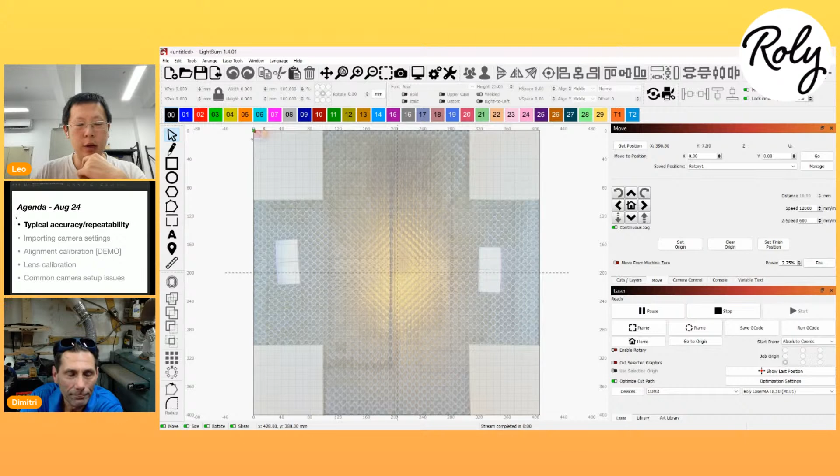Okay, so this live stream is going to be about doing camera calibration on the LaserMATIC10. We chose the YouTube format because I think last time Zoom didn't work very well for a lot of people. So now everybody can see the same screen, and we have a little bit of an agenda and a small presentation, just a few slides to go over. The flip side of that is when people are asking questions, it'll have to be by text in the chat towards the end there. So let's just get started.

I'll go over the agenda real quickly. The first thing we're going to talk about is a typical result that people can expect. I think we should be upfront in that the camera is not going to be perfect. So we'll go over what results people can expect. We'll go over importing the camera settings and a slightly different process than what was laid out in the user manual.

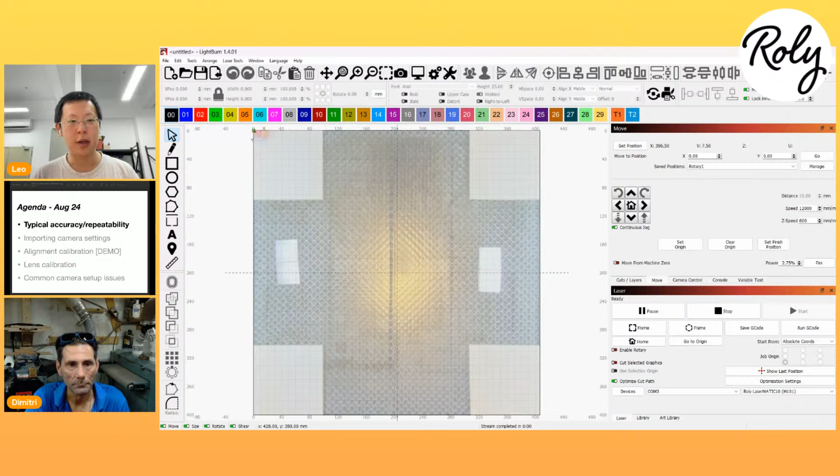And then Dimitri will do an actual demo of the calibration process, importing the files and also doing the alignment calibration. And I'll talk a little bit about lens calibration and why it's not recommended, but some people are curious about that process, so we'll go over that as well. And lastly, we'll talk about a few common pitfalls when setting up the camera, mostly to do with when people plug in the camera and they see nothing at all, or they see a black screen. So we'll talk about those issues as well. And finally, Q&A if people have questions.

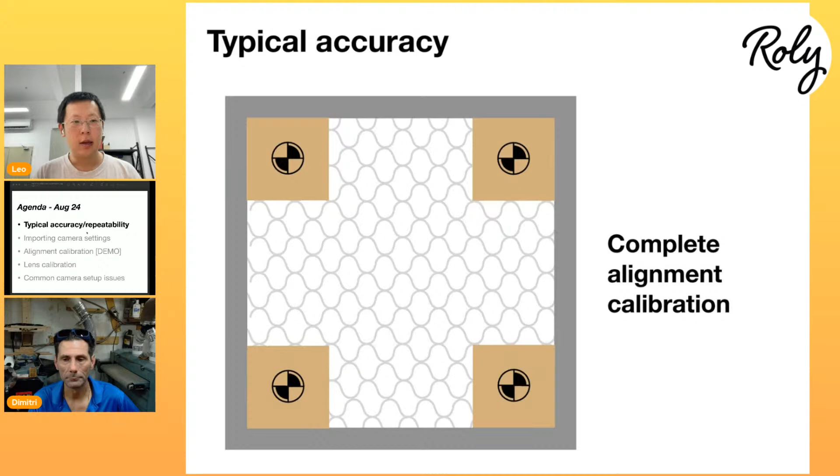So yeah, I'm gonna add this slide here. Typical results that we can expect. Again, like I said, the camera is not going to be perfect. With a good calibration, if done properly, you can expect to be within about a millimeter. So what does that look like? I'm gonna go over that now. You guys probably have seen this pattern before. It's the 4 crosshairs when you're doing camera alignment calibration. So we do the 4 crosshairs here.

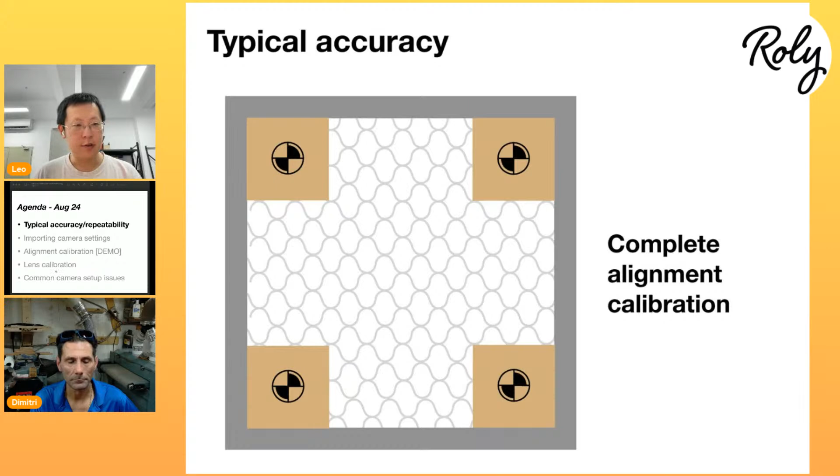That's the first step. And then we scramble the pieces of wood. We do the alignment calibration on smaller pieces of wood placed at the corners. So we scramble them around into random positions, and then we try to engrave concentric circles around the first calibration crosshairs. And that kind of tells us how far we're off by. It's a check you can do right after doing the camera alignment calibration. So what results do we get when we do this test?

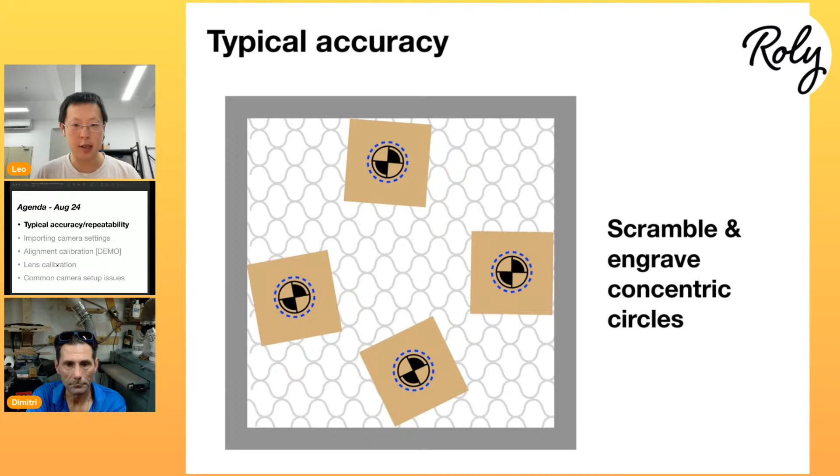So the first one, the number 2, I think can be considered a great result. You can see visually it's almost completely concentric. You're probably going to get this at around the center of your work table, and also maybe in certain areas, but typically not across the whole work table. The number 1 is a more typical result and is what I would consider acceptable. If you look at the circle next to the number 1 there, it's off by maybe 0.7, 0.8 of a millimeter when I actually measured it.

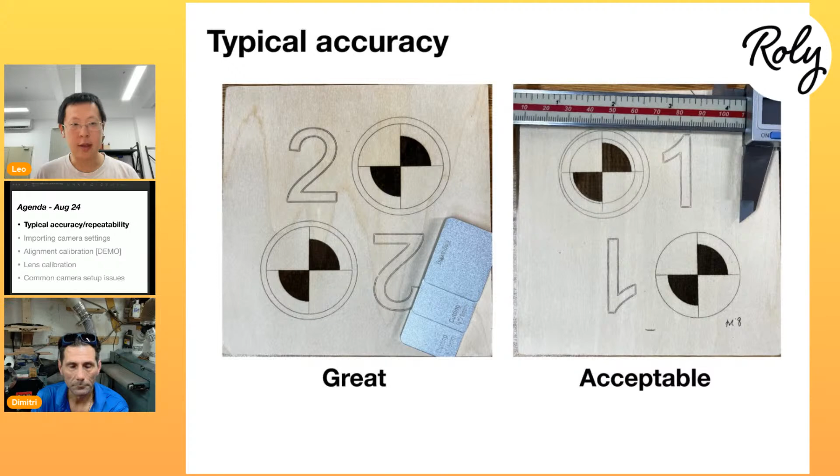So 1 millimeter doesn't sound like much, but when you're trying to line things up exactly, you definitely can visually tell the difference. So if it's a very critical job, you want to make sure you're working in the part of the honeycomb table that the camera is going to perform really well, or you should use a jig that can be positioned and secured at a known position. So that's kind of setting expectations there. And if you get a result like this, it's something we can improve today.

So if you're getting a result like this after this session with the learnings, you should be able to get a better result. Okay, so that's the first part. We want to set expectations.

Next, I want to talk about importing the camera settings. Now this is where I may have been giving people not the best advice in terms of troubleshooting.

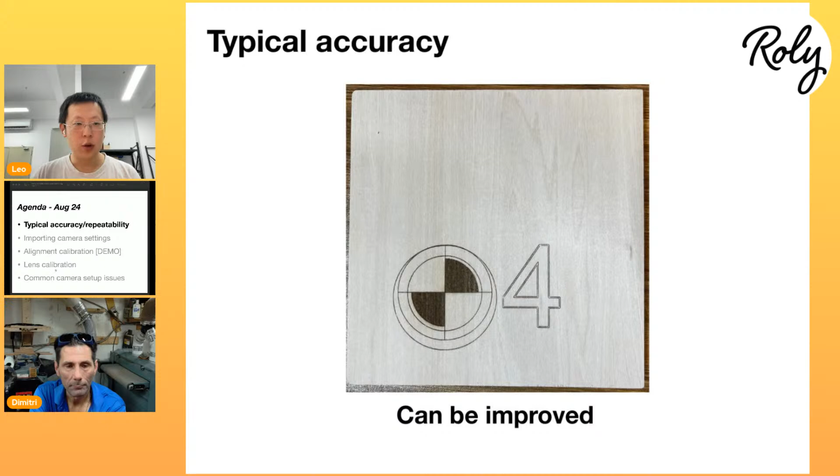Now, what I've been telling people, and this is the mistake I've made before, is when you're getting a result like this, just re-import the machine definitions in LightBurn. Now, there are 2 issues with this. I should probably share my screen here.

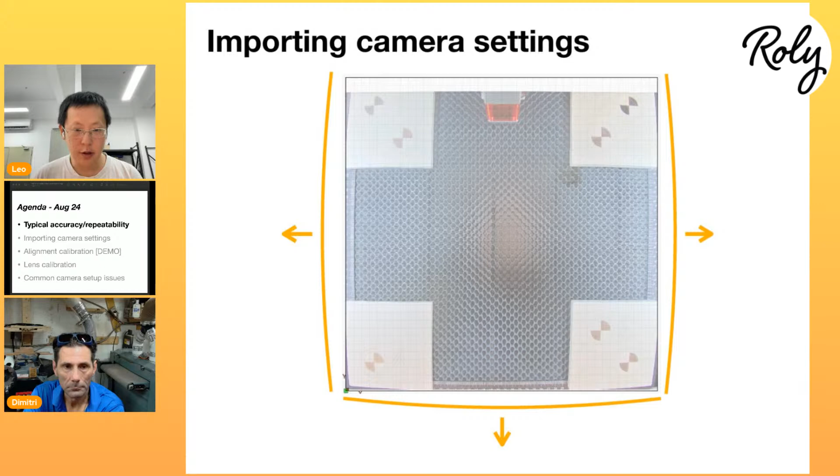Lightburn. Okay, so I'm here in Lightburn, and you can see that the edges of my honeycomb table is bowed out like this.

Now, what I've been telling people is just, you got to go into devices, and you have to remove the Roly LaserMATIC and re-import the machine definitions. Now, there's 2 problems with this. One is it wipes your machine settings. So people typically like to set up Lightburn to their preferences, and then have to start over. But also it doesn't really work.

So now if I have a setting like this, if I go and remove Roly LaserMATIC10 and add it back in, what we're going to find is that the camera image is still going to be bowed. So perhaps that's definitely my mistake for giving people that advice.

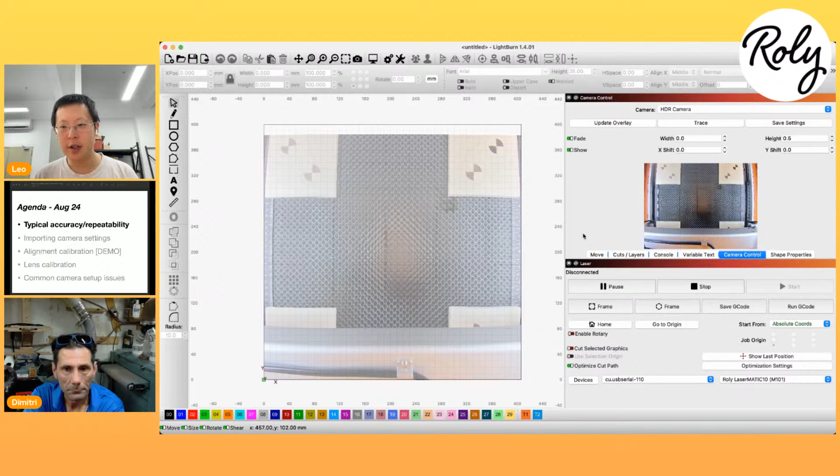But the more reliable way to do it, and easier, is, and I just found this out last week also, you can right click on the camera control panel. So in Lightburn, you have these move panels, cuts/layers, and you can bring up the camera control panel. And if you right click on it, you have options to export and import your camera settings. So in the Facebook group, I posted our camera settings just as a separate file, not together with adding devices here, but rather just settings for the camera.

So if I import camera settings now, it should be lens profile, LaserMATIC. How come I cannot import? Yeah, if I import this camera setting here and I update overlay again, you'll see that the edges of the honeycomb table are now straight, right? And that the pieces of wood also appear straight around the corners. So that's a good sign.

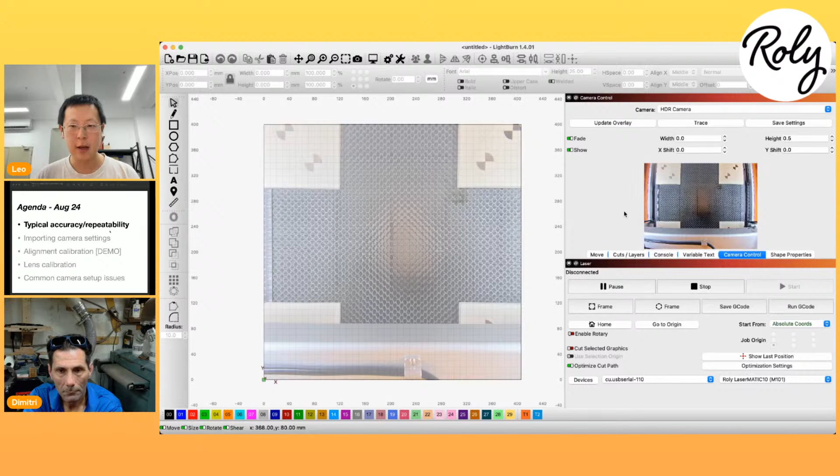You want to see straight edges before you move on to alignment calibration. And if you don't see straight edges, just download the file from our Facebook group, and then go into Lightburn, right click on the camera control panel, and then import the camera settings. And that should be a good starting point. And you no longer have to delete and re-add the Roly LaserMATIC10 and reset everything.

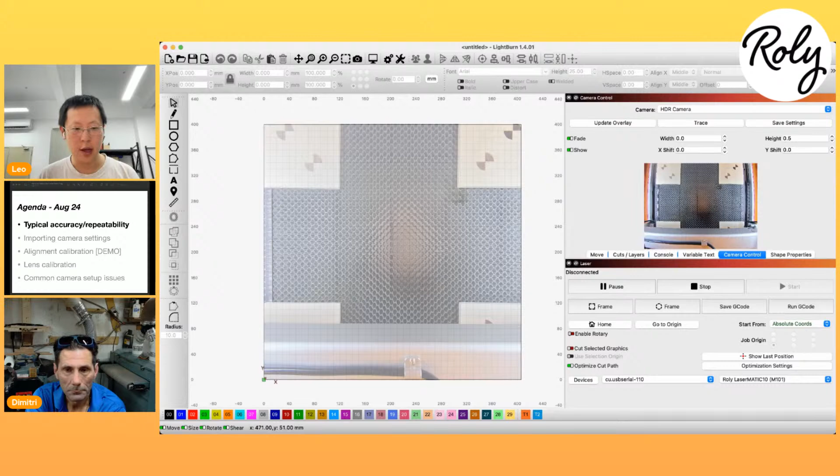So that's just importing the camera settings. But now, once you have imported the camera settings, you have to do the alignment calibration. So I'm going to hand over that part to Dimitri. I'll remove my screen. Okay, you're good to go, Dimitri.

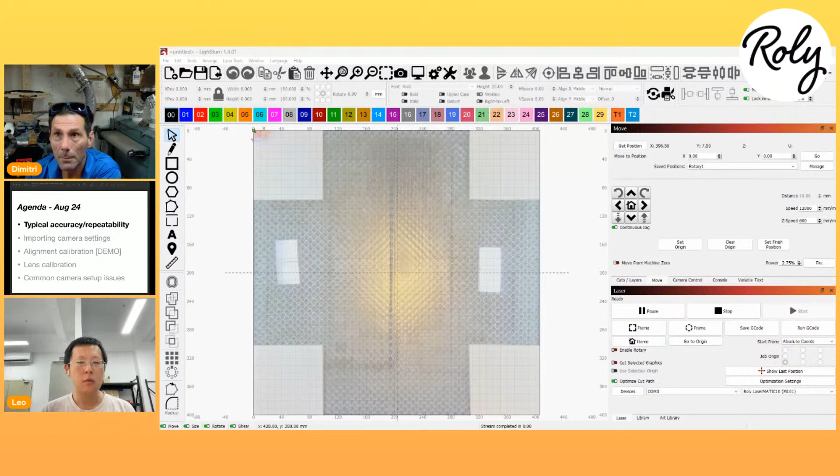Perfect. Hello, members. And Leo forgot to mention that we have to also save in camera. Okay, that's why. There we go. In camera control, once we import the setting, we've got to save the setting as well. So click on save, and that way we have the setting.

So what I'm going to do right now, can they see? They can't see the drop boxes, eh, Leo? No, they're not able to see our drop boxes. Yeah, some people commented already about that. We'll figure that out eventually.

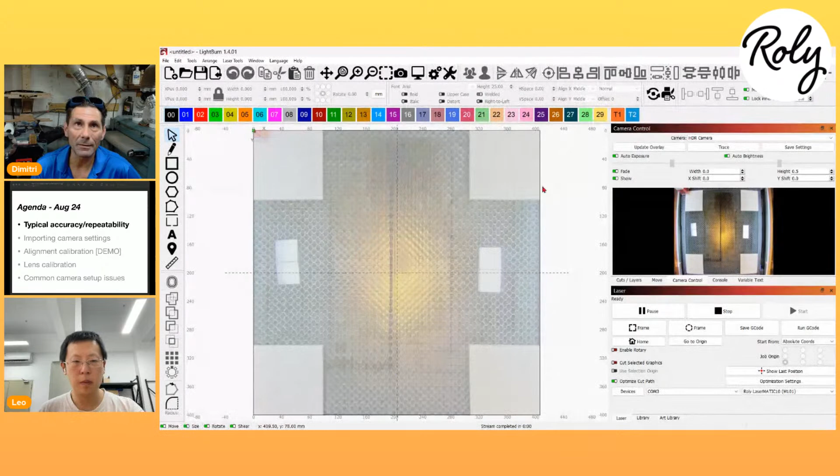So basically my calibration right now is already preset. As you see, all my squares are, my alignment is all straight on my honeycomb. And so we're going to do the alignment. And we're using the HDR camera.

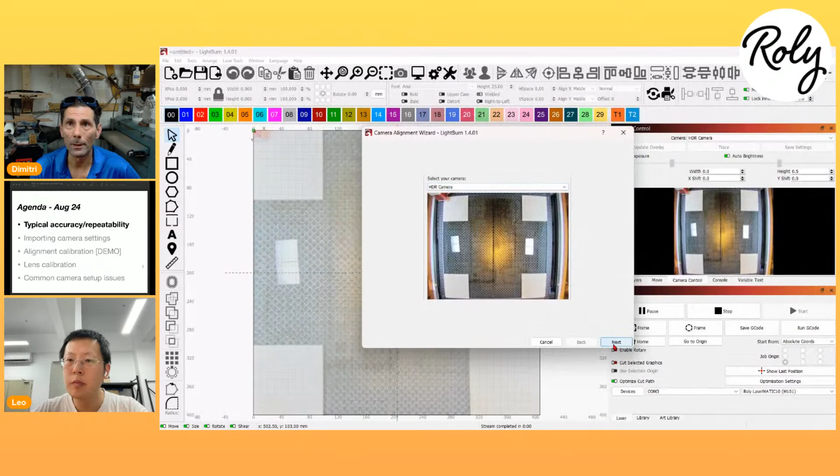Next, now I got 3mm wood placed already. I'm going to jump this up to 9,000 because we don't want to waste your time. And 100%.

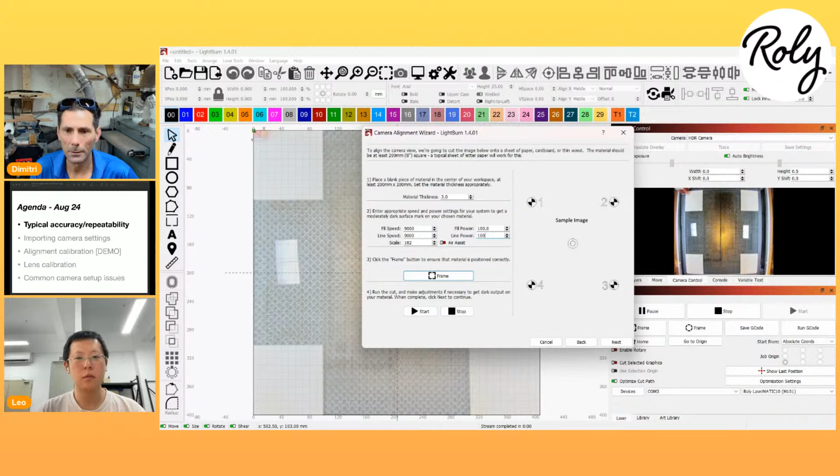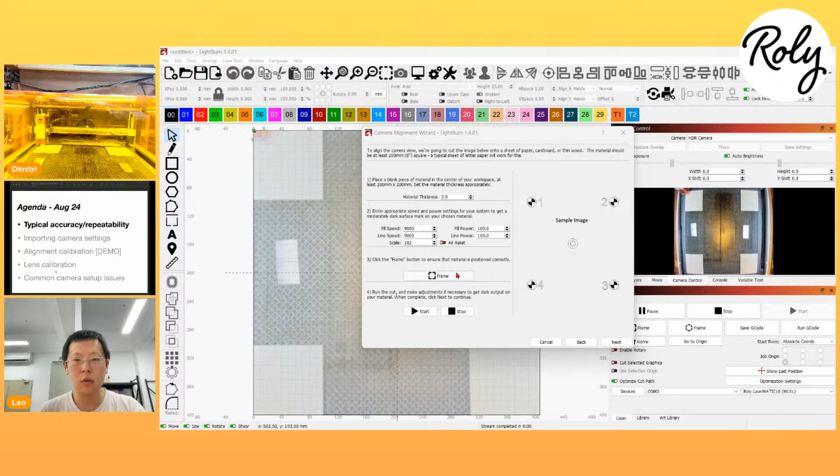I think Leo has a couple of things to mention as I, oops, let me go over here a second. Just want to show the laser. Screen settings, there we go. Sorry about this, guys. And there we go. So I'll show the laser right now. And I'm going to do the framing. And notice over here, I'm using 182 scale for our corners. So I'm going to go ahead and start this.

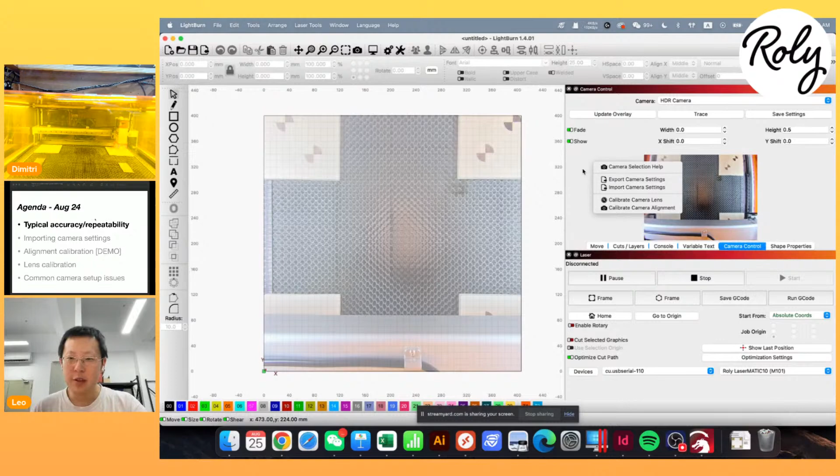So this is where we click import camera settings, and then we come to select the file that we posted in Facebook, and then we update overlay. It's going to be straight.

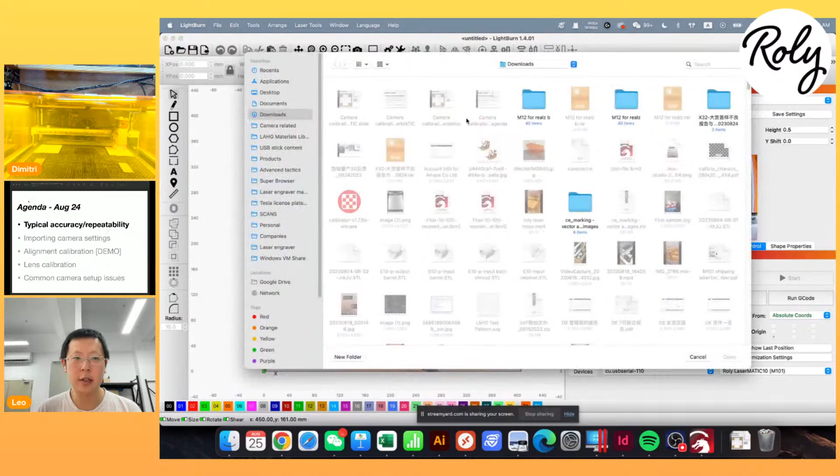So just to go back the other way, to show people, if we import camera settings, and then we choose the profile that was done poorly on purpose, I suppose, if we update overlay, you'll see that we get the honeycomb edges bowed outward.

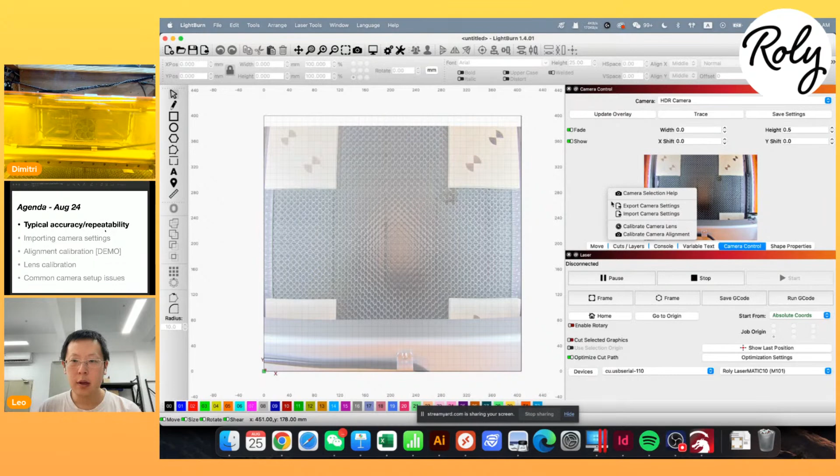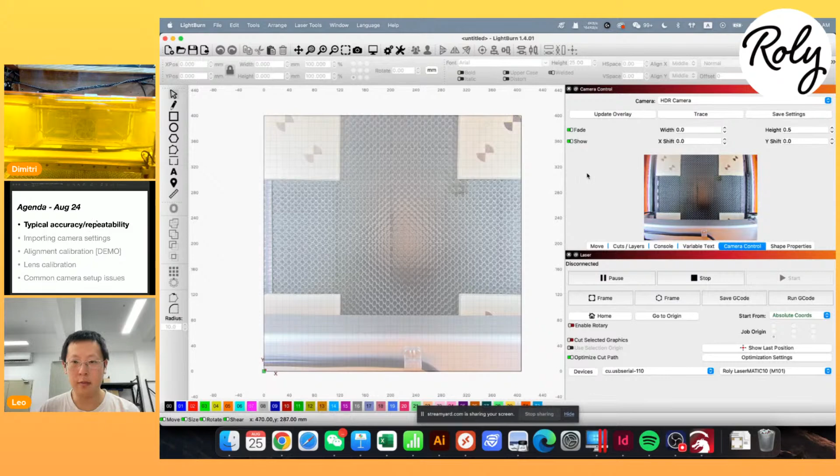And like Dimitri mentioned, once you have imported your camera settings, you update overlay, and then you do your alignment calibration, you gotta be sure to click on Save Settings, so that next time when you import, it's already got that calibration that you have done. So yeah, just now this menu wasn't showing up, so I just wanted to go over that again.

Remove. And we should be finishing up very shortly.

Okay, sorry for the smoke, guys. If you see it on the screen, I don't have my venting presently activated because my impeller makes a lot of noise at 85 decibels. So it's a little bit deafening on the mic.

Actually, I can turn off my mic. How does that sound? Give me a sec.

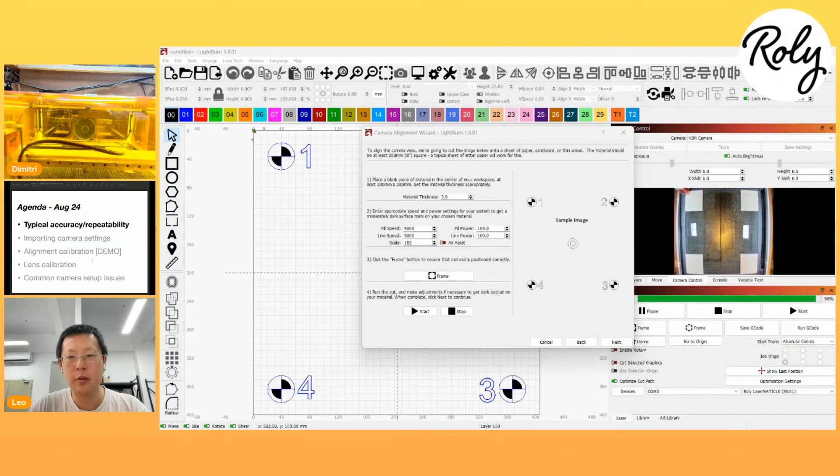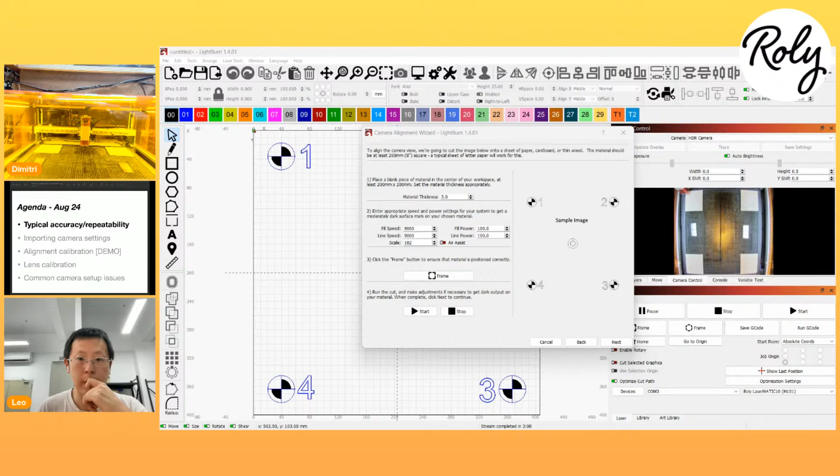Alrighty then. So that's all done. And camera. There we go. So we're all done with that. So next, capture image. And now we enter our little marks.

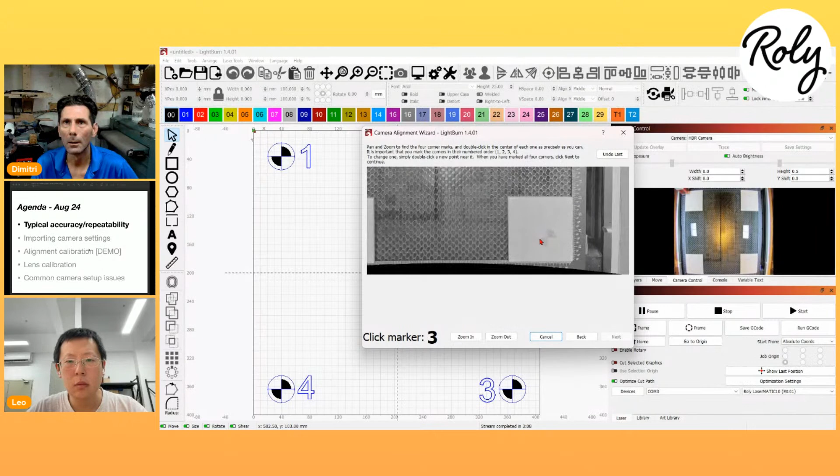And we click on finish. And now we want to save our settings at the same time. So this way now they're in there and we can export our settings. As you see, export camera settings right now since we saved them. And we click in a new name, basically test.

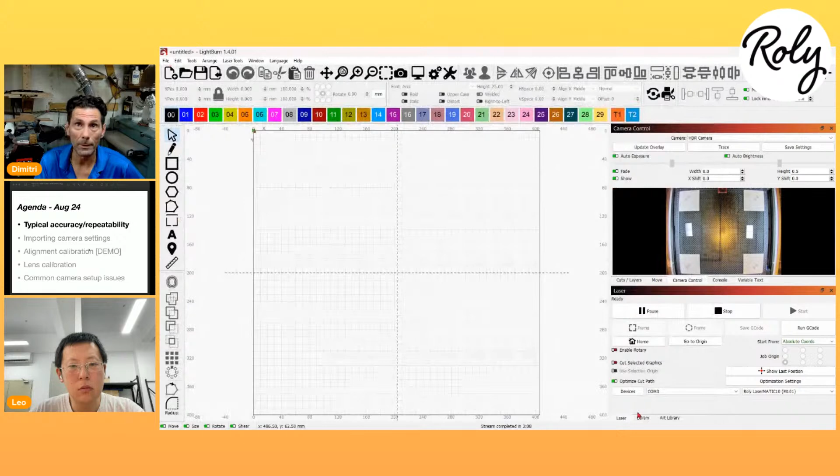As you see on my screen, everything I've already calibrated for all different types of thicknesses in 3 millimeter ratios. And that's it. So whenever you want to bring in a specific thickness of board or material, we just go in and decide which material thickness we're actually engraving on. And by doing so, your accuracy will become much greater. You'll have less chance of error.

So this was engraved at 0, and then I went diagonally to the opposite corner of the grid, overlapped the image, and we're talking this was off by 0.1, 0.2 millimeter. So that's 0.1 or 0.2 millimeter off.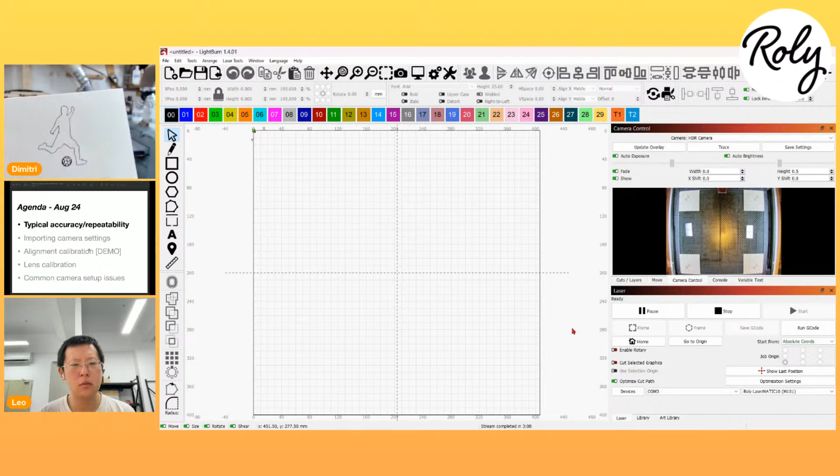So I'm pretty sure if I played with the camera a little bit, played with my mouse a bit further, I may even have gotten it perfect. So it's very accurate, very accurate. But again, it all depends how you align your crosshairs to get that accuracy bang on.

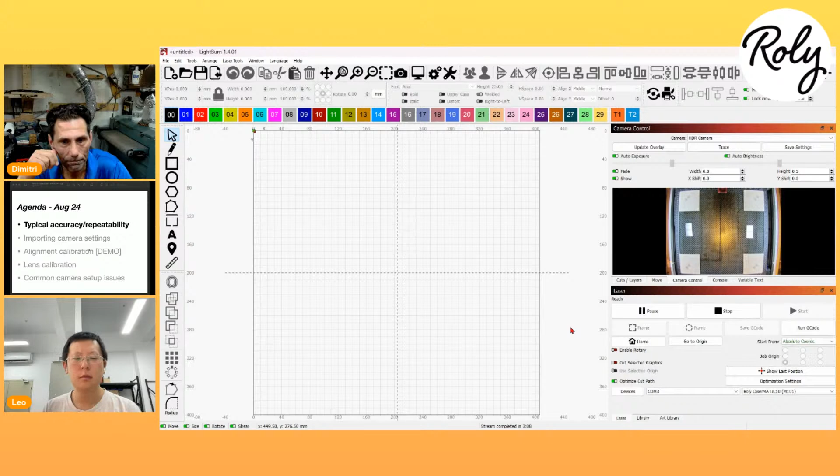Do you want to try the test now? Let's see what we get. Yeah, sure. Okay, let me switch cameras. Yeah, I think we might have gotten a little bit lucky last time. Find the board. Here we go.

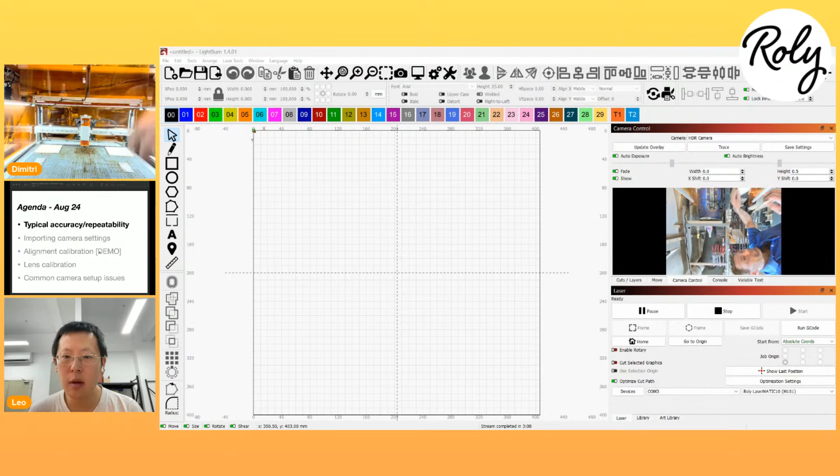Alrighty, so let's home it. So while you're doing that, I'm going through the chat.

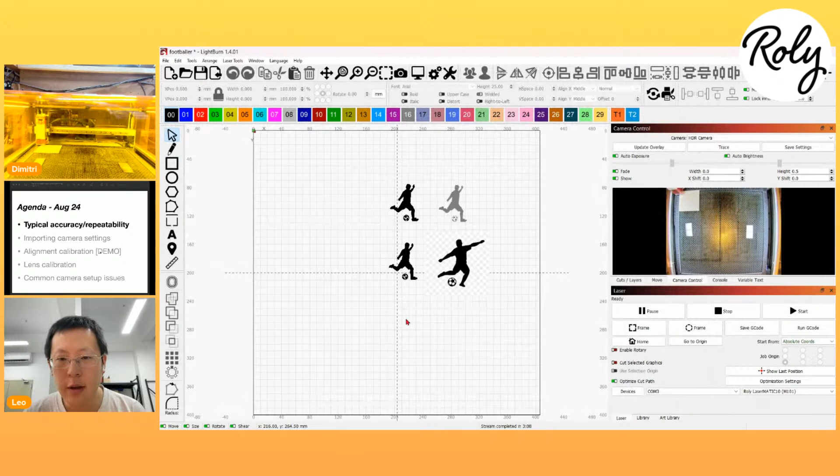Laszlo said, are you making a different profile for each thickness? Yeah, like Dimitri was just saying, if you calibrate on, let's say, a 1/4 inch piece of wood, and then now you have a job for 1/2 inch, that calibration result is going to be off by a lot if you're using a different thickness material.

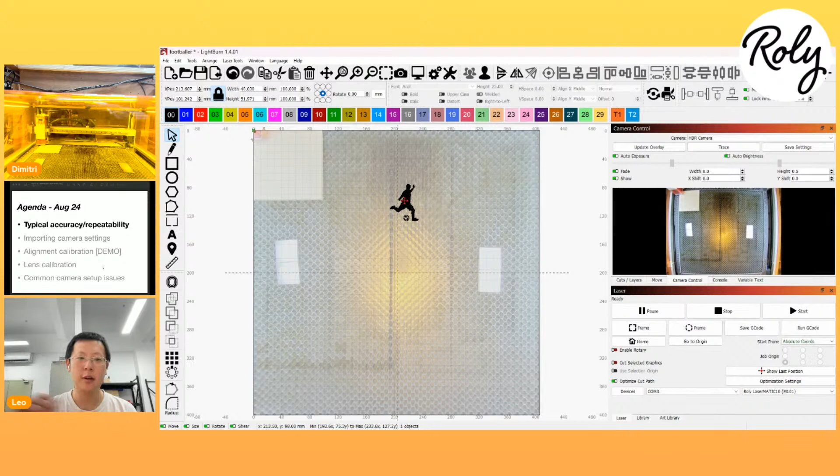So what you have to do is calibrate again using a 1/2 inch material and then save that as a separate file. So you can name them, like Dimitri is doing here, just by the thickness of the material. So then when you have the 1/2 inch job, you load the 1/2 inch calibration result. So for every thickness that you commonly would use the camera for, you have to have a calibration file.

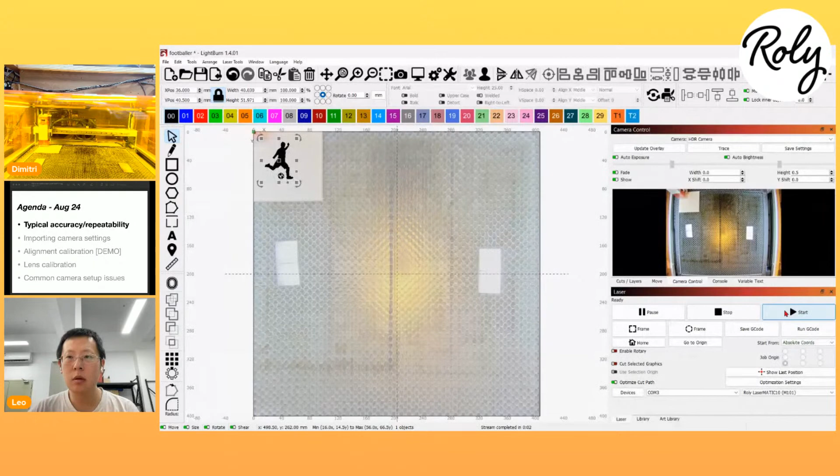Okay, so now I'm going to run it. Yeah, okay. This shouldn't take long.

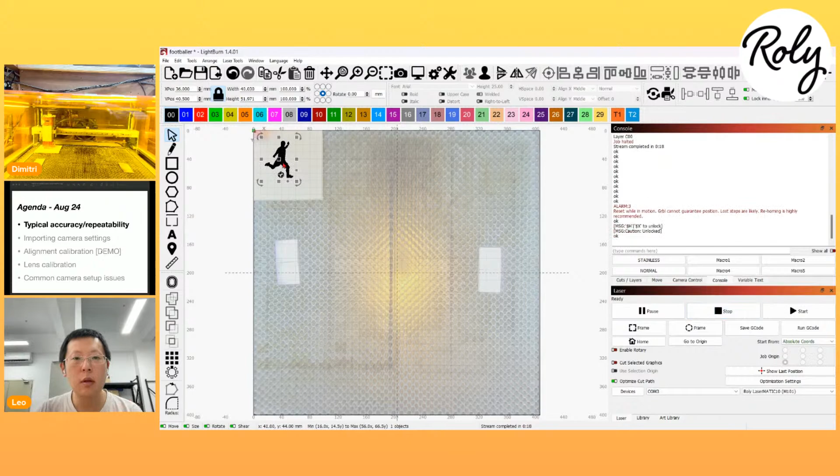Oh, I'm doing a fill. Ah man, hold on a second guys, I made a mistake. Yeah, I do that all the time too, because the alignment calibration file is in fill mode. So then when you do something right after, it stays in fill mode.

Okay, like for example, if you want to test with the concentric circles, you want to switch to line mode right afterwards.

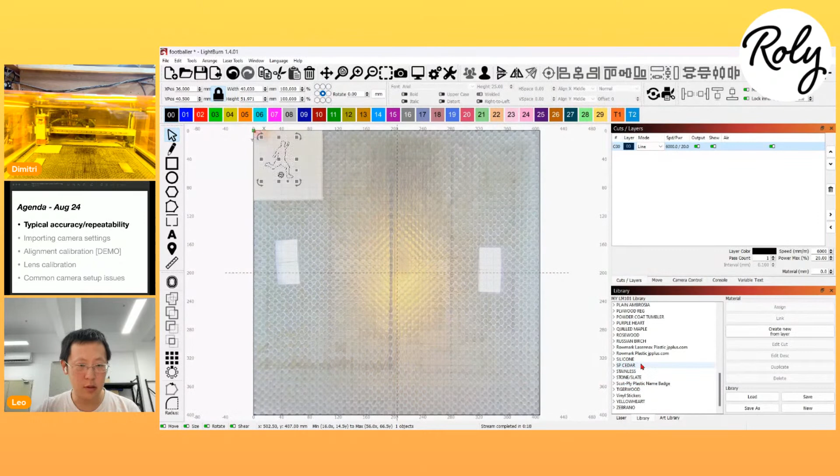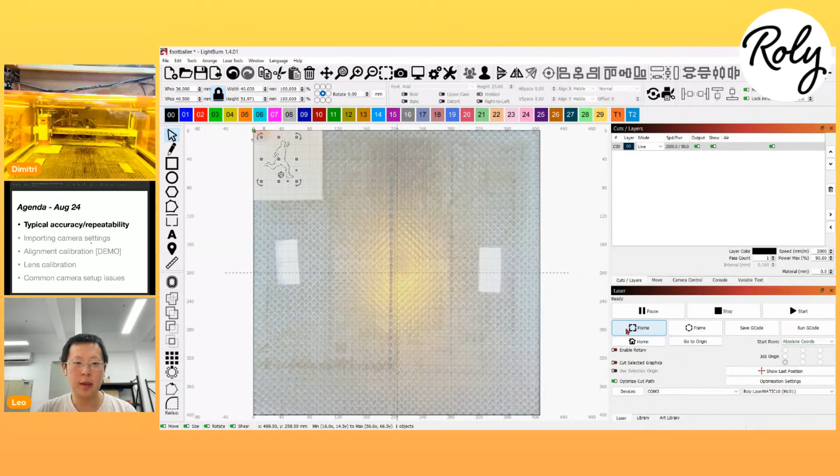Kenny is asking, is the camera that sensitive? Well, it's not really the camera being sensitive, more just a difference of a quarter inch or half inch, it's a lot, right? Because the camera has a 90-degree view angle. So if you're a quarter inch closer to the camera, you're more towards the center or more outward. But it's a big difference.

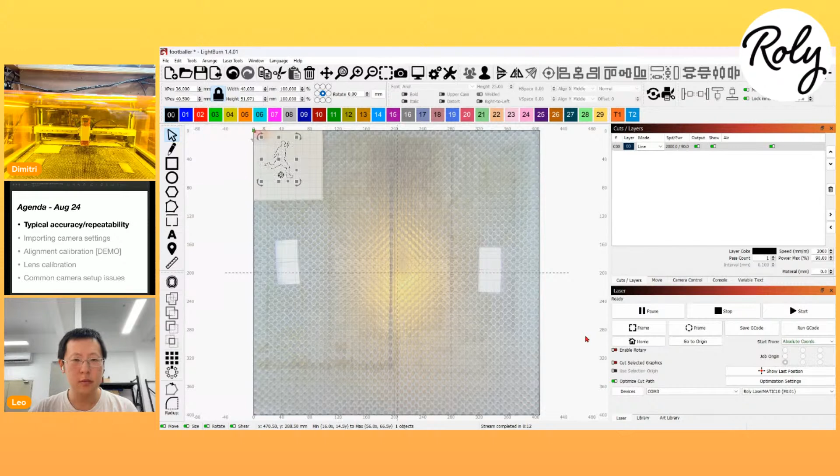So that's the engraving. And now I'm going to put it all the way down here.

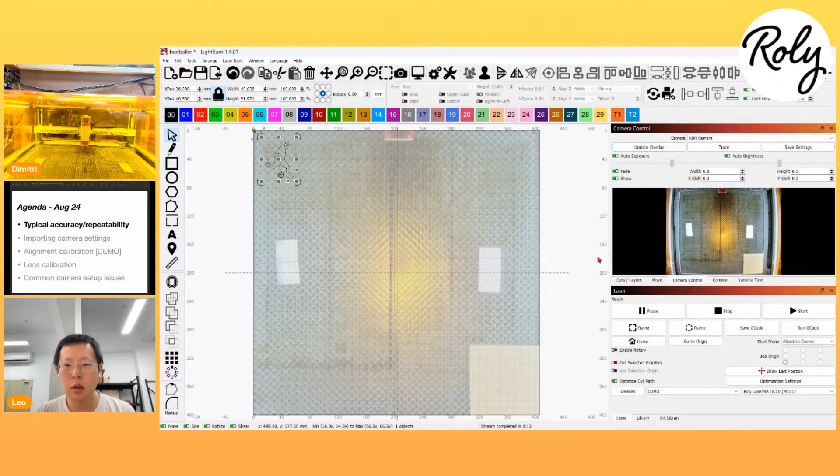So we started off at 0, 0. And now we're going to take the opposite corner. There we go. And we're going to bring our image... so let's shift.

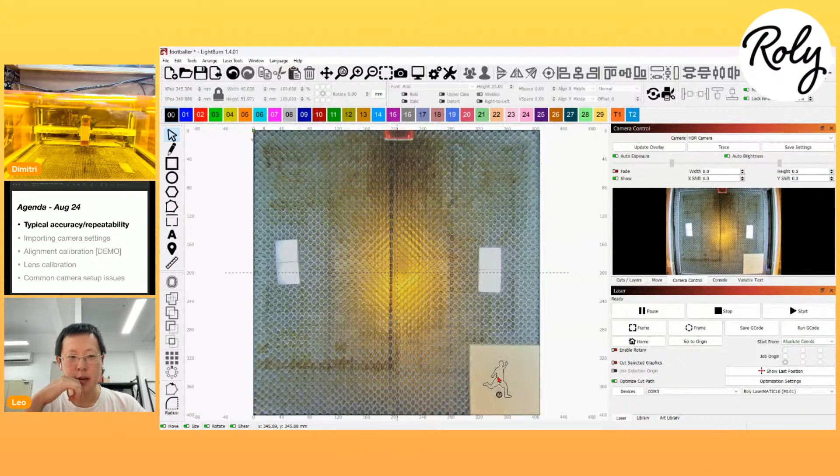Is that Control or Shift? Control, I think it's Control, yeah. So when you're dragging a shape, if you press Control in LightBurn, that stops it from snapping to the grid, so you're able to line it up with the pixels more precisely. Yeah, that's a small tip. I think I'm pretty on.

Okay, all right, let's see this. I'm a little nervous. Okay, now home the laser. Okay, and let's start it up.

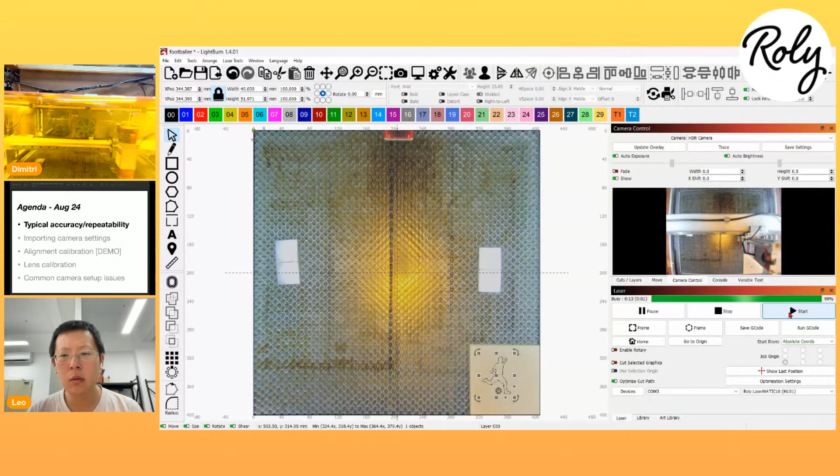Yeah, that's a little bit off. That's a little bit way off. Oh. How much are we off by? We're off by quite a bit. I don't think I used the right settings. Yeah, I see, let me try this again. Mm-hmm, because I'm pretty sure I used the wrong settings.

I think you then have to calibrate the camera again. Well, no, I already have it, I already have my setting in there. Oh wait, did you use 3mm or test? 3mm, I didn't, I used over here, this one, which is the wrong one. Right, yeah, 319, exactly. I think because we were just doing test, test would be more accurate then.

Yeah, but I didn't really use my crosshairs to be accurate. Oh I see, so when you were clicking on it, I see. I think in that case we would probably have to calibrate again. Give me a second, yeah.

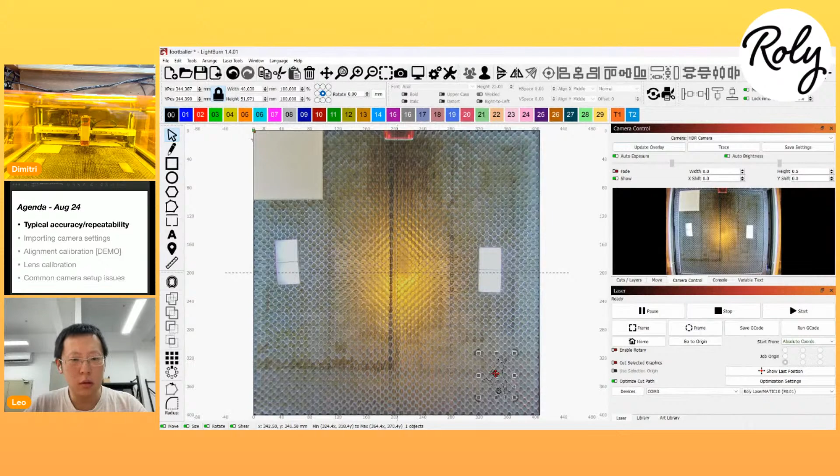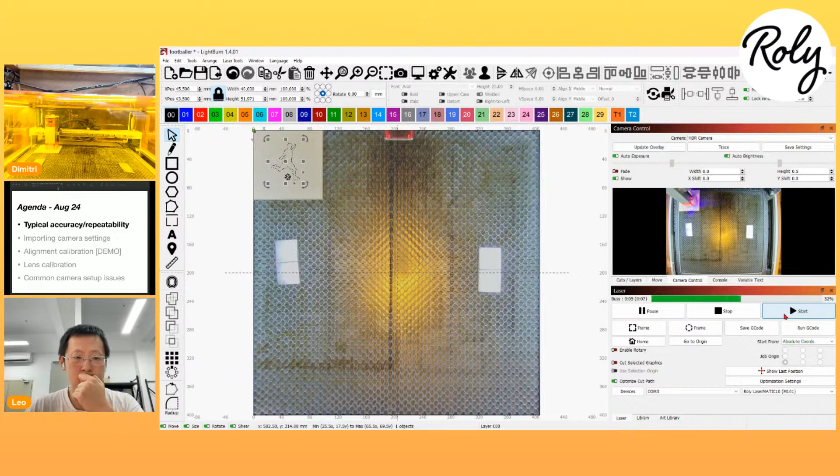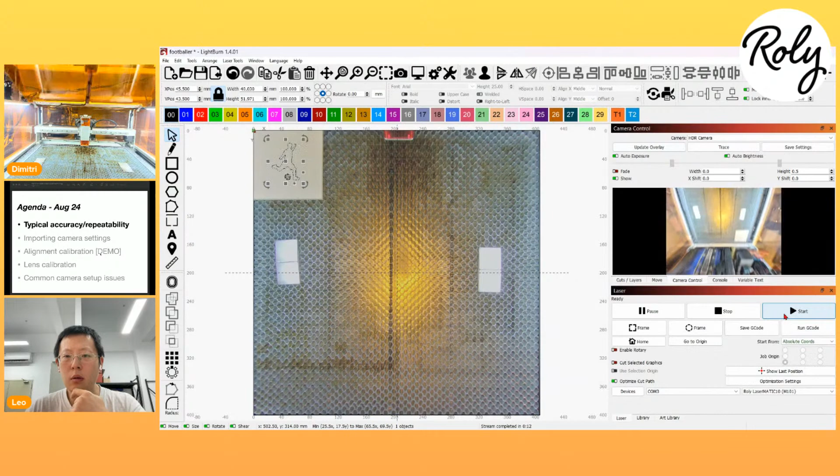Okay, I'm gonna look at the chat again. Go. And let's do another overlay. Okay. I think I got it. Yeah, I think I got it. Okay, so little frame. And start again.

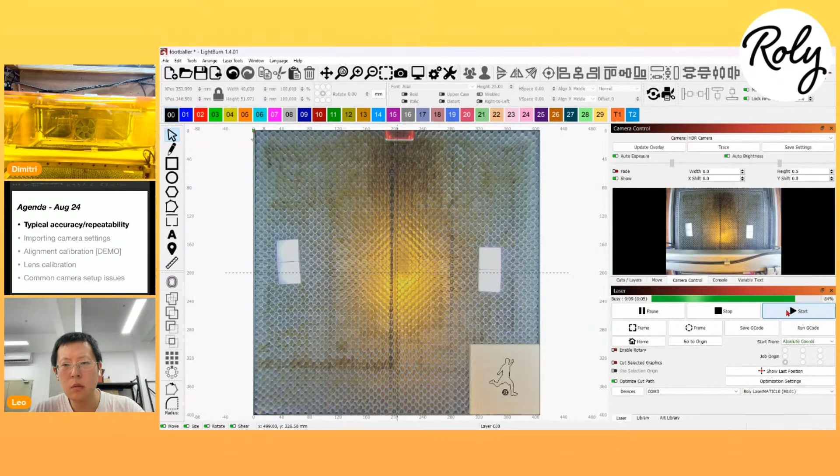Much better result, yeah. Okay, so the difference here is basically 0.2 millimeter offset. Okay.

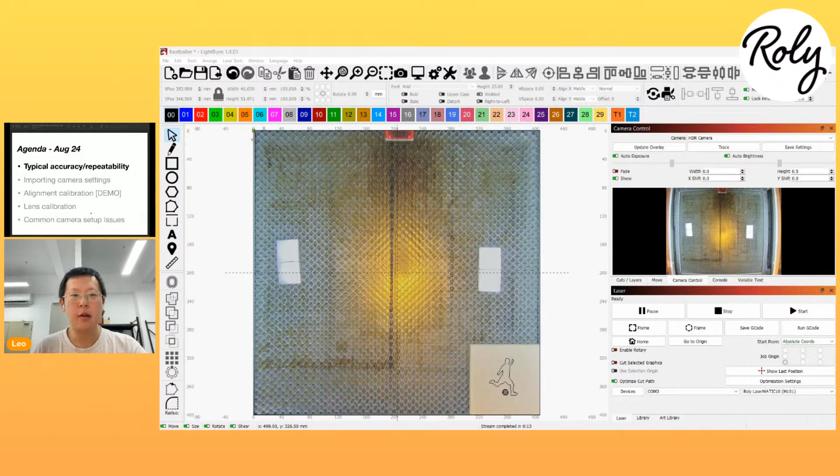Wait, I think Dimitri got disconnected. I think Dimitri is gonna come back soon. Oh okay, okay, you're back. Okay yeah, can you switch the camera? Perfect.

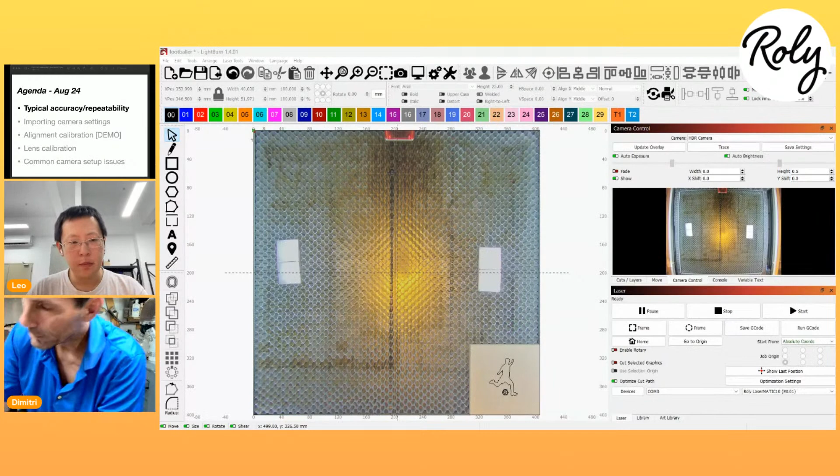Okay yeah, yeah, that's really good. So we're talking 0.2 millimeter basically. Yeah, not as good as last time, but still a really good result, I would say. Compared to this one we did yesterday, that one's pretty bang on. I think we got lucky with that one. Yeah.

So those are the results, guys. I mean, pretty good, a lot better than before, that's for sure. Yeah, I think so. I think what happened was...

I'm remembering your folder with all the calibration files. So I sent you the file named 3mm, that one was calibrated on my machine, so it has the right lens profile. But when you loaded it, since it didn't have the alignment calibration from your machine, it's going to be off by quite a bit. So that's what people would get if they just download the file and don't do an alignment calibration. So I guess the lesson is: the lens calibration file is pretty good, but once you download it and import it into Lightburn, you still have to do your own alignment calibration, and save it to your own calibration file.

So that's that, I think we can move on. Yep, let's do it. Okay.

So, oh, I just realized I haven't been... did you answer Laszlo? Yeah, I did, yeah, okay.

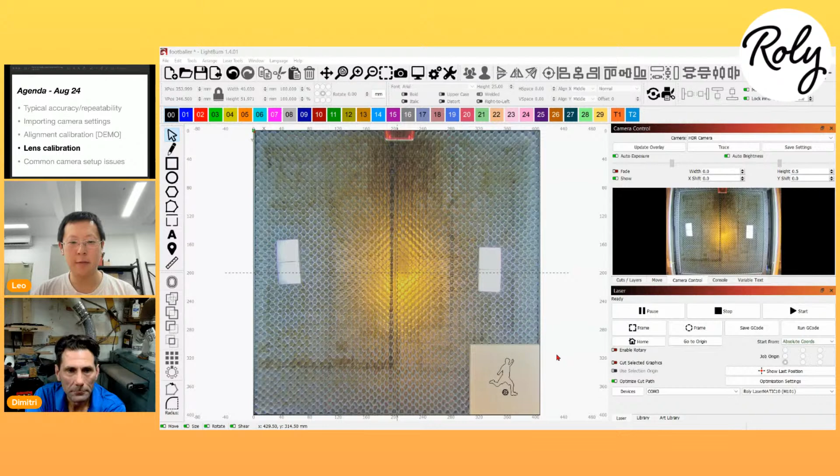All right. People have been asking, so I'm gonna go over it really quickly. With our lens profile and a good alignment calibration, usually you're able to get to the within 1mm we talked about at the beginning of the live stream. But if you're not getting that result, then maybe you have to do a lens calibration. It's very uncommon. I don't recommend it.

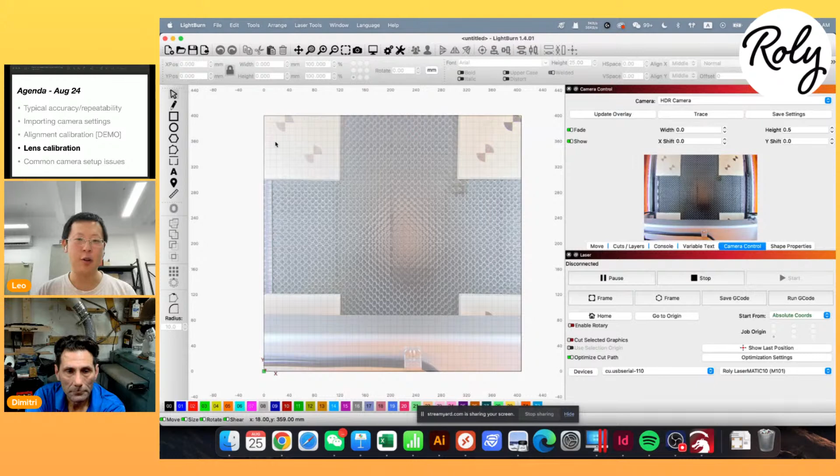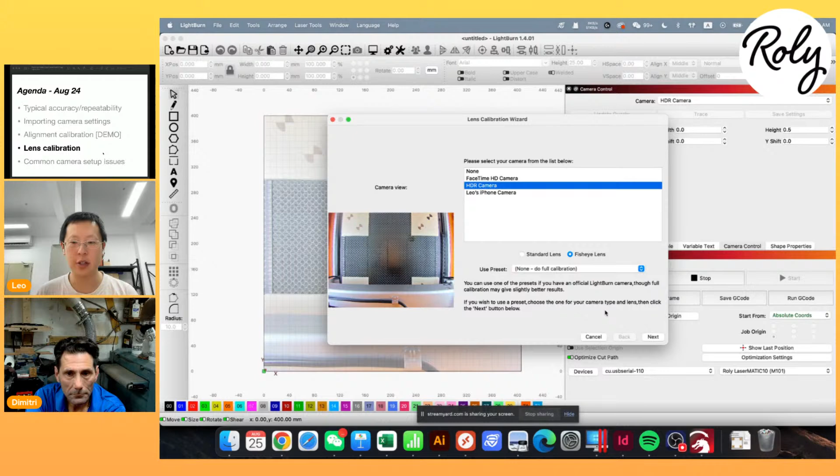But if you do have to do a lens calibration, you come to Laser Tools, Calibrate Camera Lens. This is where I differ a little bit from Richard's video when he initially reviewed the LaserMATIC10. So you select the appropriate camera, the HDR camera, and then fisheye lens. But instead of selecting one of the presets, you gotta select none and then do full calibration. Okay, so I'm gonna click next, and I think people are familiar with this, the polka dots pattern.

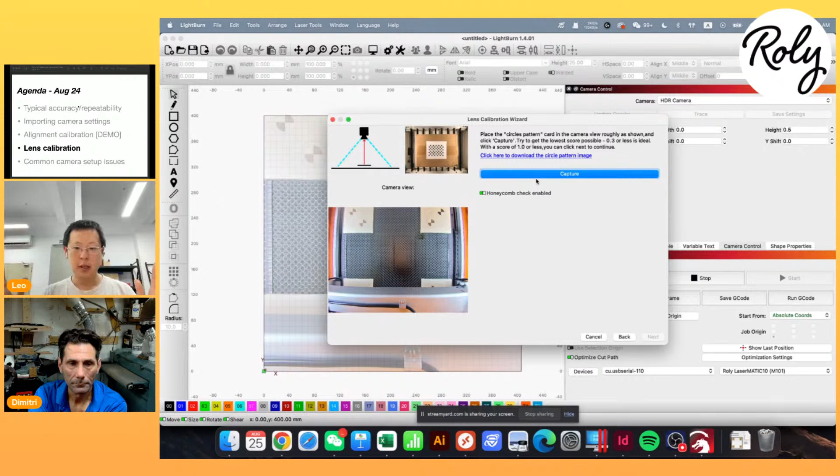But the important thing is you actually can't put the pattern on the laser bed, not with a fisheye lens. You can do that with a standard lens, but with a fisheye lens, you got to lift up the camera and then hold a piece. I'll show you. I got it prepared over here. So you got to hold something like this to the camera by hand. Okay.

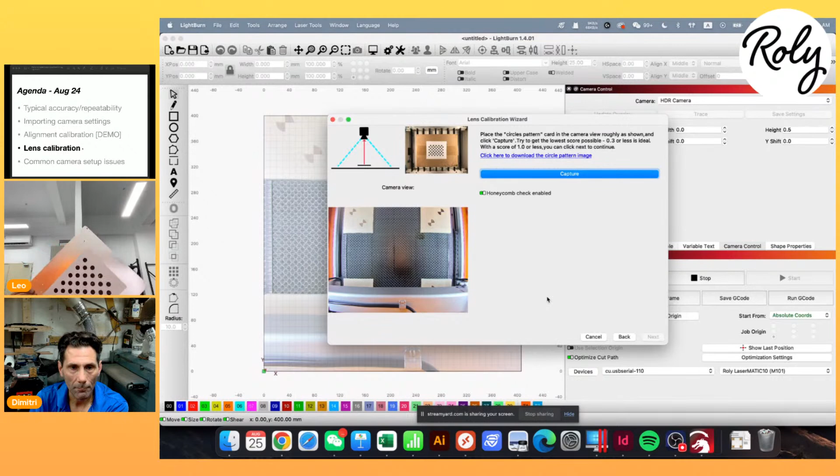Okay. I'm gonna switch. So you got to make sure the printed out polka dot pattern is taped to a flat surface. So here I have an aluminum panel, and then next, I gotta make sure it's the right side up. So you got to lift up your camera, and then you have to hold it to the camera like this.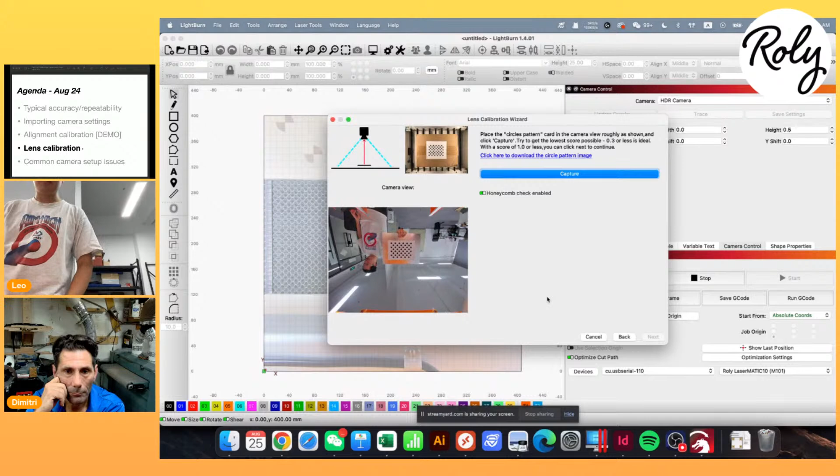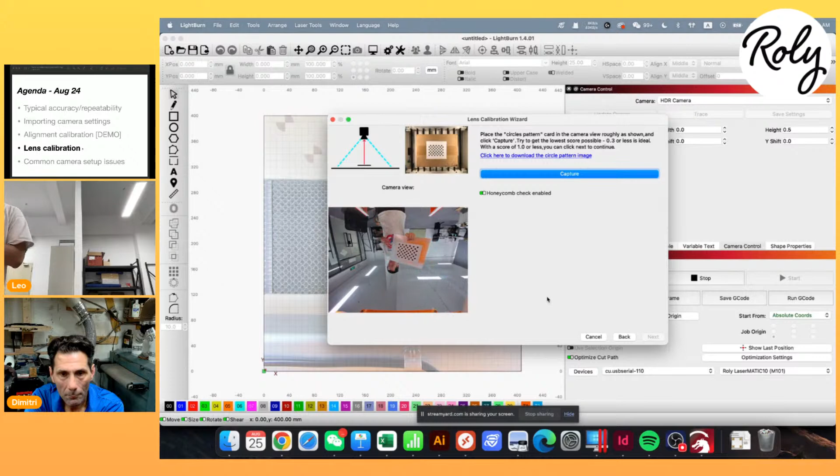I know it seems a bit counterintuitive because now you're losing reference to the workbed, but because the lens calibration is something that's completely intrinsic to the camera, it actually doesn't matter what the camera is looking at. As I move to the corners, you can see it's getting a little bit warped. So you're just trying to capture the intrinsic quality of the camera, basically. I might not be able to finish it here. It's going to probably take way too long. But you hold it to the camera, and then you click capture.

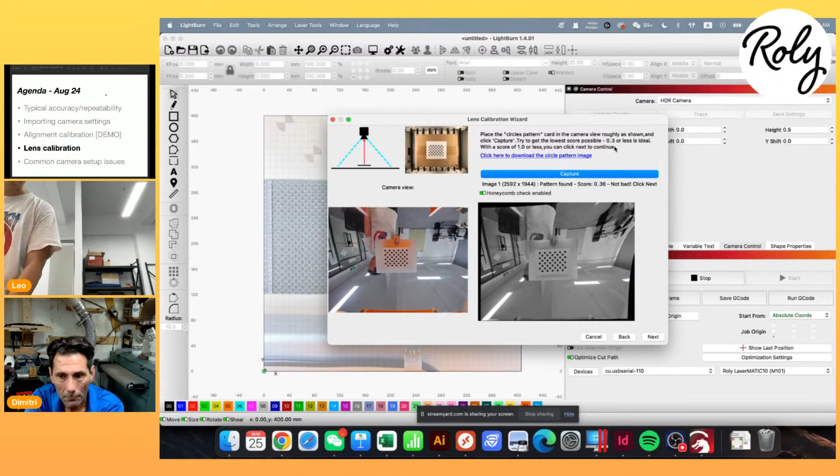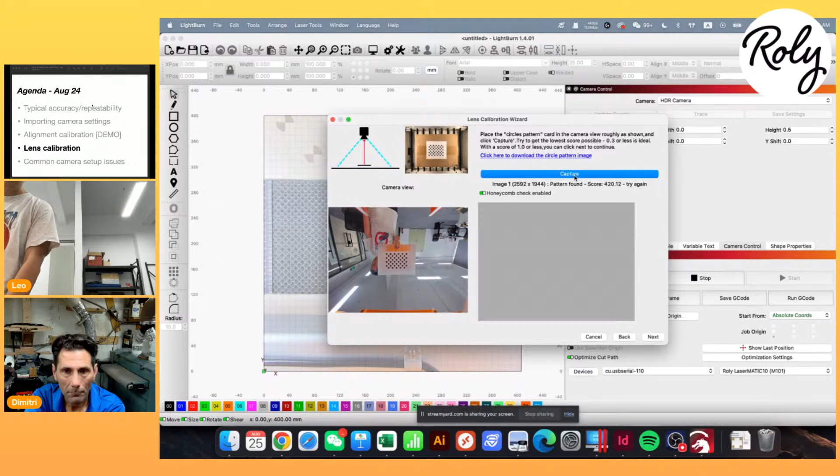So here I got a score of 0.36. Now that's not good enough. It says you should get a result of 0.3 or less, but anything below 1 is accepted. I would strongly recommend getting a result that's at least 0.2. So we can play around with it a little bit here, but it is a test of patience. Okay, 0.07. That's a great result.

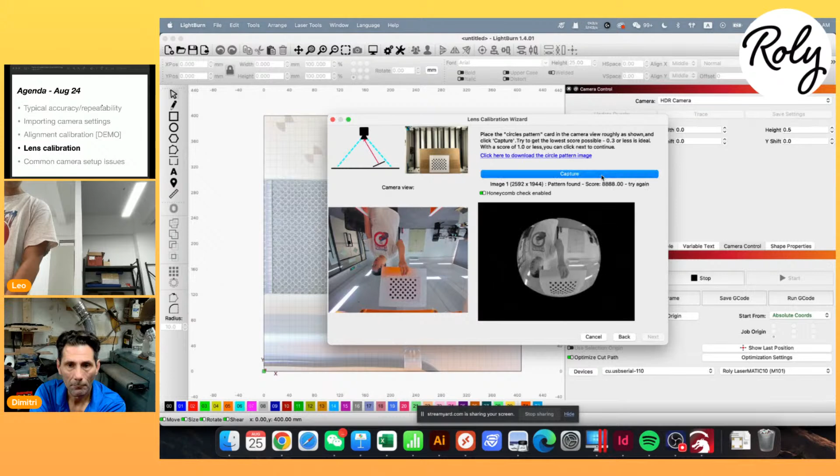Now, it doesn't really matter that the image inside this black square here doesn't make sense. We just have to trust that Lightburn is satisfied with the results, so we're going to move on. And then we click next. Now, you got to know the camera is inverted in this position, right? So when it wants an image on the bottom, you actually got to hold it up like this. So then we'll capture the next image. 0.15, not bad.

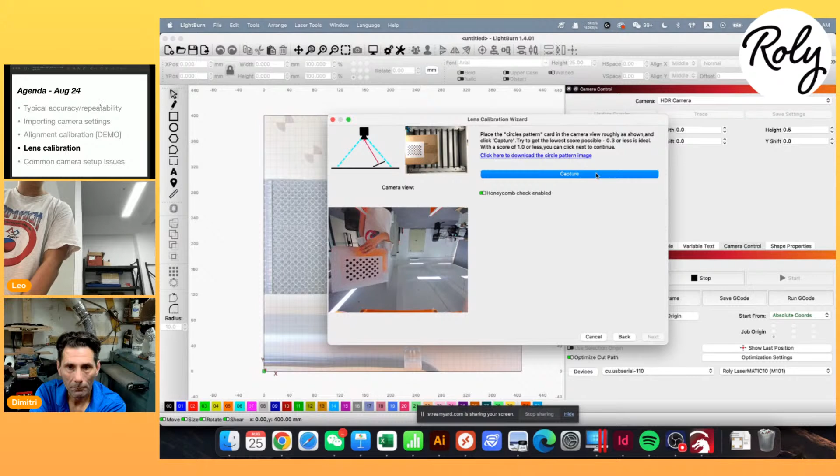Next. I'm not going to finish it here, but you get the idea. The first one is usually the most time consuming, but once you get the first one right, I think Lightburn becomes a little bit easier, so this one on the first try, we got it no problem. But it's really the first one that you got to make sure you get a good number. If you accept a result of, let's say, 0.9 on the first try, then it's going to throw Lightburn off for all the subsequent calculations it has to do.

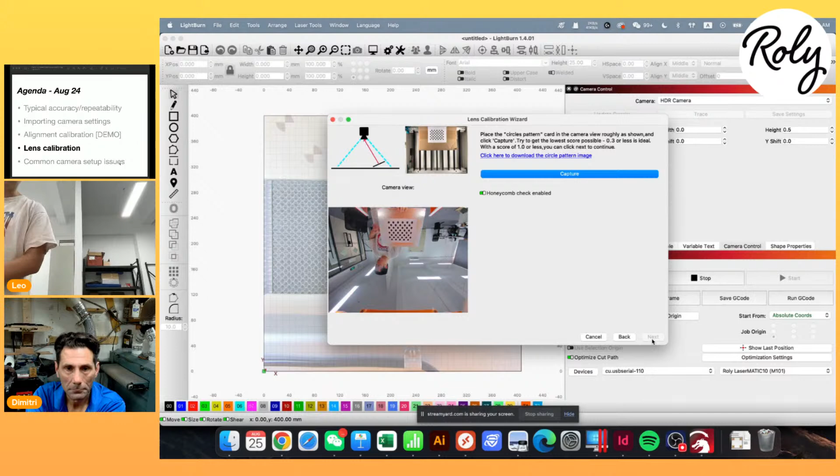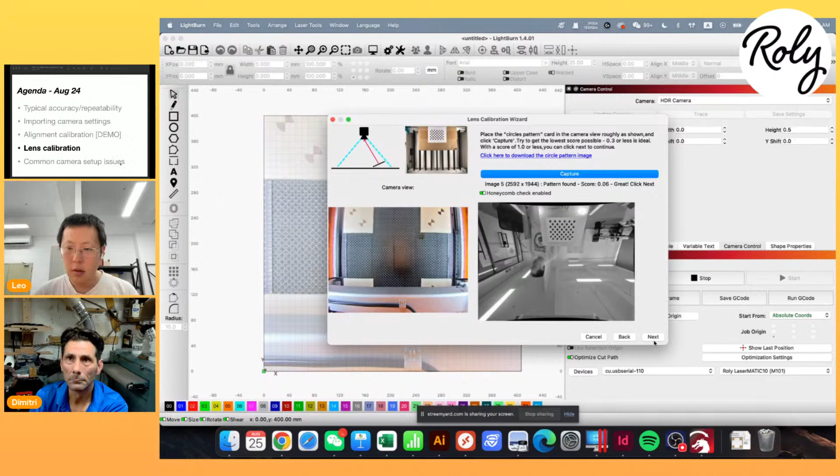So now we're kind of getting a good result on each one. We're going to capture again. 0.06. Okay, so it's going pretty well. But I'm still not going to finish it. I'll close it here. Okay, I'm gonna turn off my screen share.

So I guess the takeaway from there is you gotta print the polka dot and then tape it onto a very flat surface, and then you have to hold it up to the camera and not place it on the machine bed. The other takeaway is the first image is critical. You want to make sure you get a really low number in Lightburn, so patience with the first one pays off for the rest of the calibration and the calibration result as a whole.

But I guess the biggest takeaway with lens calibration is it's not recommended. We have tried many times to beat our original factory settings, and we have never managed to, otherwise I would be uploading a different file to Facebook today. The original settings were pretty good, but I think it's still possible that for certain cameras on certain machines, maybe a user effort would improve the results. So that's that. I think we can move on.

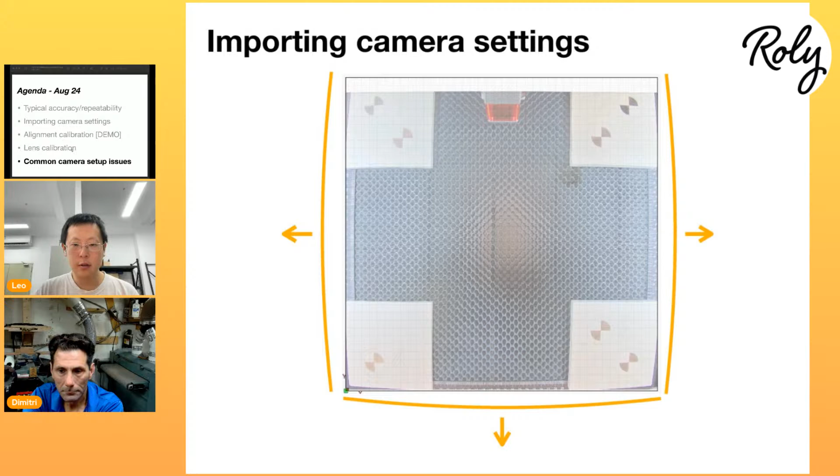So the last thing we want to talk about is common camera setup issues. I can quickly go over these, Dimitri? Yeah. Okay. So whenever people plug in their camera and they don't see an image, they just see a black screen, or they see the camera working fine in their native camera app in Windows. This is only for Windows, actually. But then they don't see it in Lightburn, so issues like this.

So if you're using Windows 7 and Windows 8, maybe also Windows 10, you said? Yeah. Windows 10 Home. Okay, that makes sense. You have to install the UVC driver. UVC is just a common video protocol for the camera.

And I believe it was one of our users that cued us onto this. I believe it was Carlos. That was Carlos, yeah. Carlos Patterson. Shout out. Okay.

So we were stuck for a little bit, but there's a Google Drive link, I think put up by the Lightburn guys, so we can post that in the group as well. So that's a common pitfall. If you see a black screen, that's most likely on Windows, and that's most likely the fix.